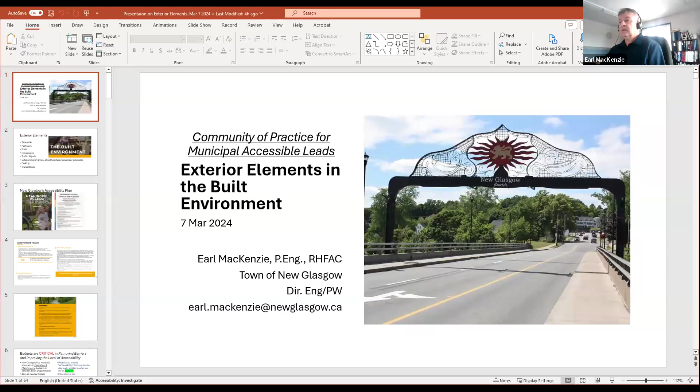So I'll get going, I'll share my slides here. I'm just making sure... Okay, can everybody see the main slide, not the one with the side notes? Is it just one slide that you're seeing? Yes. Okay, so let's get going.

I'm going to try to make this just like a conversation. A lot of things we've learned over the years, a lot of things we're still learning. I was selected or asked by Julie to do this, but that doesn't mean New Glasgow is that much more ahead of anybody else. We're still learning, all of us as staff members. I'll have some slides here of mistakes that we make, but it's meant to see if we can learn.

Before joining New Glasgow, I was in the town of Trenton, so I'm pleased to see Mary Lou on today.

So I'm going to talk about exterior elements. This isn't meant to be like a table of contents, just some basic ideas of things we can talk about today. We might even do them in a different order, but I want to talk about sidewalks and pathways, trails, a lot about crosswalks, some about traffic signals - and I realize every municipality here probably doesn't have traffic signals, but they're so important - exterior ramps, street furniture, temporary sidewalks, either ones constructed to support an outdoor cafe or during construction.

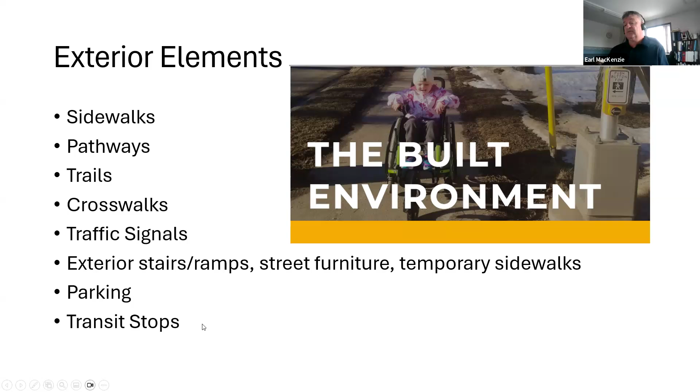Parking is so important, and New Glasgow is just getting into the transit world. We have lots of improvements to do there, so you'll see some slides that aren't very flattering.

So we have our accessibility plan that we're working towards. I find that we're slow, but probably no different than a lot of municipalities. As the accessibility lead, it's not a dedicated position - I kind of mention this at different times when I speak that I'm the Director of Engineering and Public Works, so this is still kind of on the side of my desk.

New Glasgow is big enough that I'd like to see us work towards having a dedicated coordinator to really help push us ahead. But we've been doing some good work, and some of that will come up in the slides.

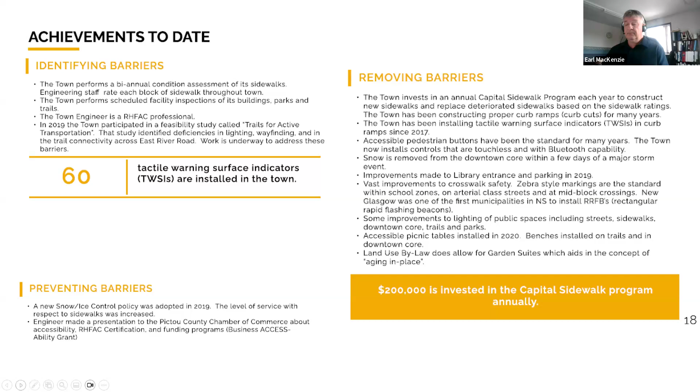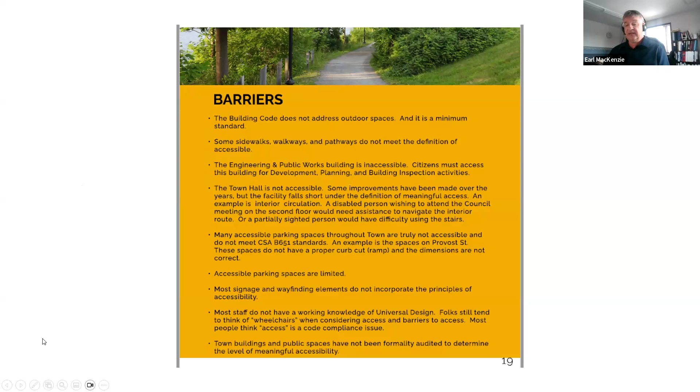So we have to have a program to replace these. All of this stuff has to be picked up by audits - an audit is where we actually identify the barriers and determine a plan and a way to fund that plan.

So I want to start really with budgets, from my perspective. Budgets are critical in removing and improving the level of accessibility. Similar to everybody else, we have two main streams: our operation and maintenance budgets, and our annual capital budgets.

Within our operation and maintenance budget, there are many line items that actually go towards improving accessibility and removing barriers. We need a common sense approach to asset management, and that includes accessibility. We do have an asset management plan, but I'll admit that's not something I pick up on a daily basis to do my job.

It's kind of, we get the check mark by having an asset management plan, but it's more the practices and the staff on how we do our business. So we need to embed accessibility into our day-to-day work. We do that for safety - like every job our crew does, safety is paramount.

We're not always thinking of accessibility, and accessibility crosses over so many different departments, whether it's recreation or public works. But we have to be looking at it. First of all, we have to be educated. Education is key. We have to understand what meaningful accessibility is. I know there's still folks out there that think accessibility just has to do with a wheelchair user, but it's much more than that. Accessibility has to involve everything we do.

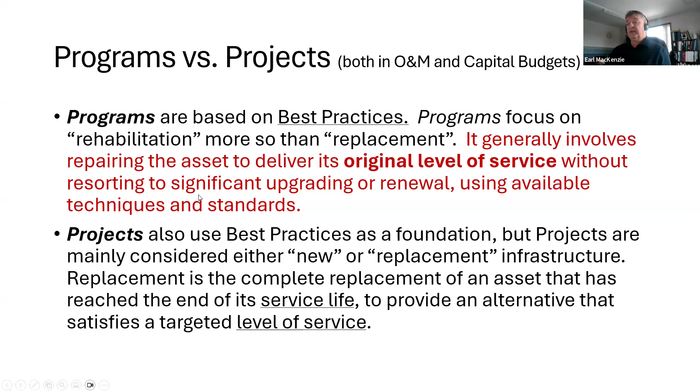In our budget submissions, we have two kind of streams. We think of things that are programs, based on best practices and items required annually every year - a good example is a sidewalk renewal program. Then we can look at budget or projects, where we do a replacement or a new item - maybe the construction of a playground is a project. But both are directly linked to the budgets and directly linked to accessibility.

I wanted to talk about sidewalk construction - that is so important. Public Works in the town of New Glasgow constructs our sidewalks. We're very lucky to have a dedicated and very good crew that construct our own sidewalks. We rarely contract out sidewalk work. If it's part of a larger project like a water main renewal and sidewalk work is included, then that will be done by a contractor. But in general, the town of New Glasgow installs their own sidewalks.

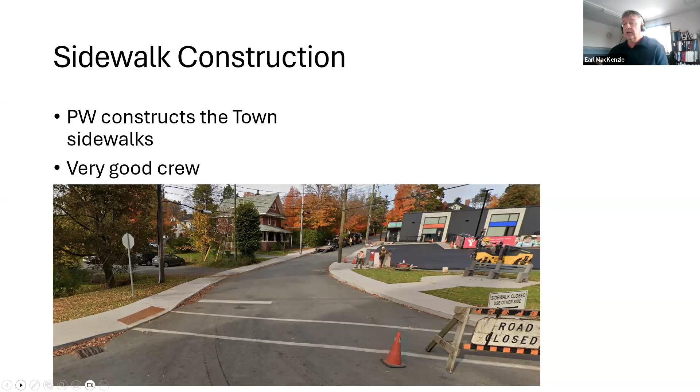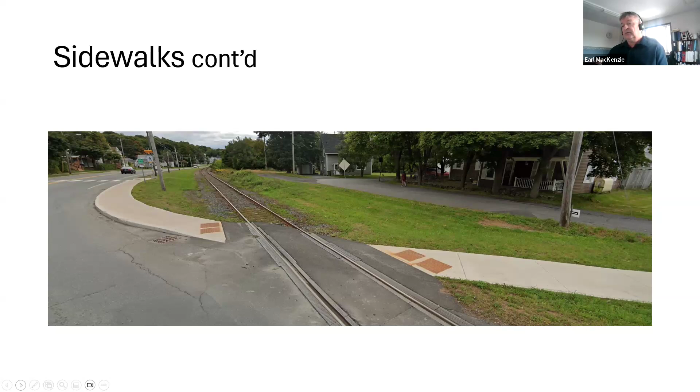Now you'll see the tactile plates in this picture. I don't like when they install the tactile plates with a space between them - that's an example of where we continue to learn, and as staff get more and more used to installing the tactile plates, hopefully we'll do a better job. I'll show some examples later that they're not as easy to install as they show on a diagram - you'll see, in B651, they're a little bit challenging sometimes to get them in.

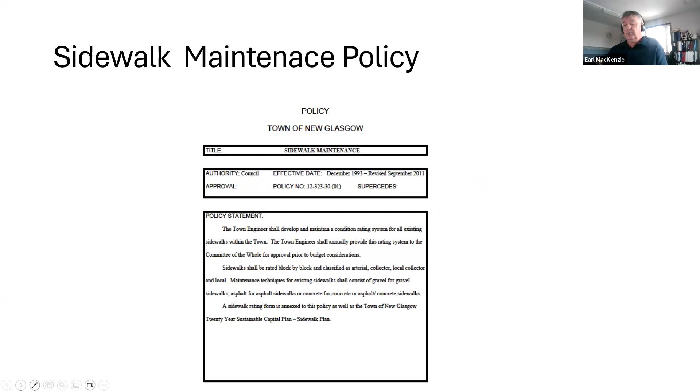So we start with the sidewalk maintenance policy. Here's a policy, I believe, from 2011, and what that policy states is the engineer will develop an annual rating system for our sidewalks. So we do have a rating system for our sidewalks, but actually we do it every 2 years, so it's not quite as the policy says.

Every year or every 2 years, we have an engineering student walk every inch of sidewalks in town - again, that's only the sidewalks that exist, we also have to put sidewalks in where they don't exist. The student looks at things like cracking, raveling, dips, trip hazards, drainage, other. What I want to add to this list is curb cuts - one might have a sidewalk that's in relatively good condition and doesn't warrant replacement, but if you come to the intersecting street and there's no ramp, well, that needs to be corrected.

So we consistently were doing that. I will say last year this line item didn't get funded, so we only did the work in the O&M and weren't lucky enough to be supported by council. So that's a challenge. Again, back to my statement on budgets - if we don't have the money as a department, it's pretty hard to make the improvements.

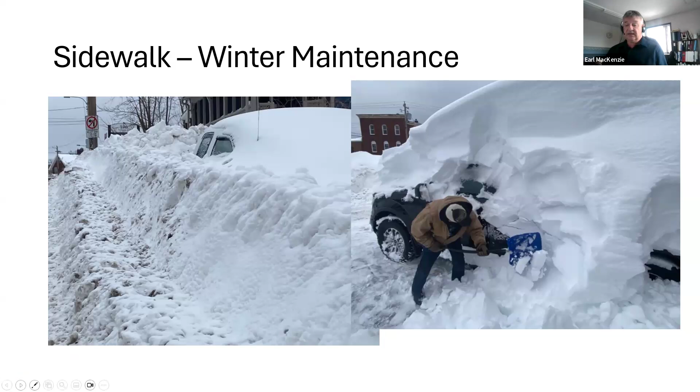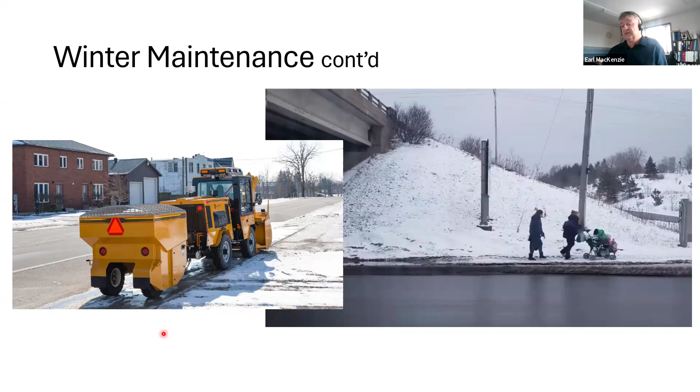So when we talk about winter maintenance, the town of New Glasgow has a relatively new, because it's 2019, snow and ice management policy. So what we did in 2019, we looked at our old policies and developed a new comprehensive policy, mainly to do with clearing of streets.

Now that is a very subjective statement. What does that mean? Does it mean that something should be cleared within several hours of a storm? It depends on the size of the storm. So there's a lot to go. A policy by itself is not the answer solely.

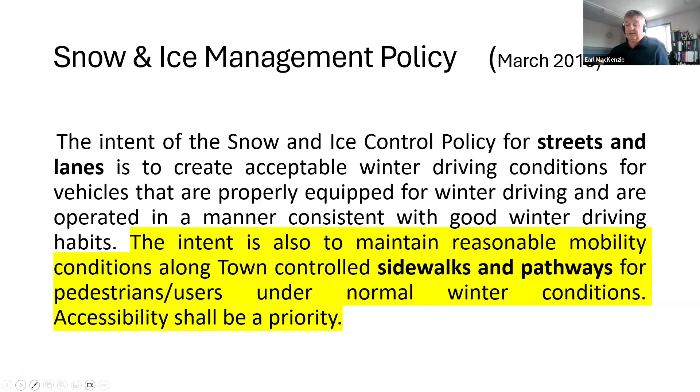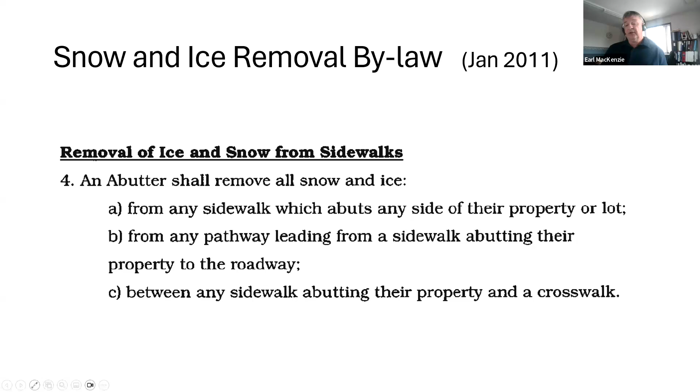Now, the town of New Glasgow does still clear those sidewalks with the machines that I showed before, but it really is the abutter or the property owner responsible for maintaining that sidewalk. But again, 9 times out of 10, our machines are through before anybody is even clearing it. That's the only area in the town of New Glasgow where the property owner is fully responsible for the sidewalk.

We have about 7 kilometers of urban trails. The Samson Trail is probably in a little bit better condition, mainly because the other trails don't have lighting, whereas the Samson Trail on the west side is a very highly used trail. Folks come from out of town to park and walk the trails.

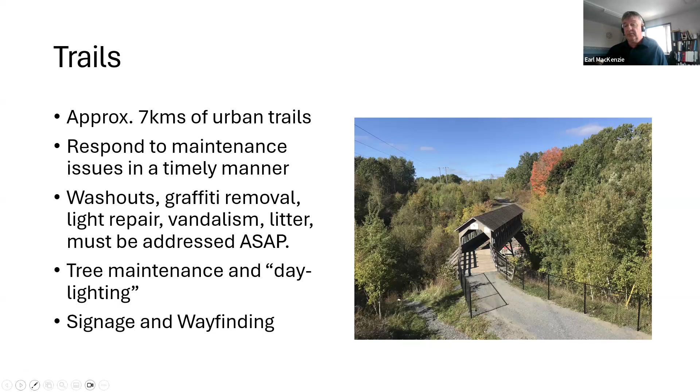So there's a couple of pictures of our Samson Trail. It is an urban trail. It isn't paved, this is mainly crusher dust. So it does answer the need for a firm level surface, not as good as asphalt paving.

The picture over here on the right is a bridge that we did a couple of years ago, I'm going to guess a replacement of a bridge. But now, as I'm looking at this picture, should there be a proper handrail along there? Probably. But at the time, that's something that nobody would have even thought about. They would have constructed what we refer to as a guard, more for protection, but not a handrail. Now it's a wide bridge, so I'm not sure, but I think a handrail would be warranted there.

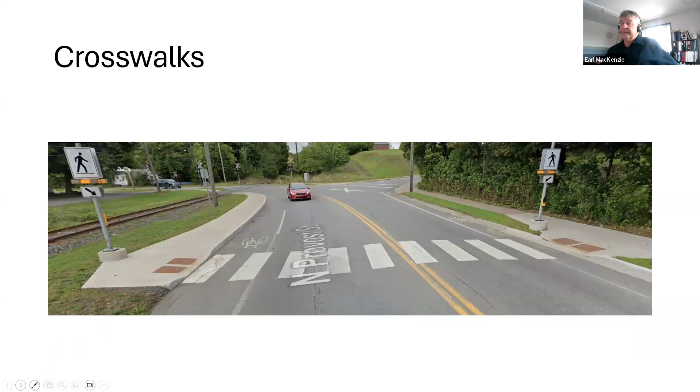Okay, let's talk about crosswalks, because they're so important. Just a photo — this is actually at that same site where I showed before, but here's a crosswalk. And I'm going to talk here in a minute about different types of crosswalks and how you go about determining how to properly construct a crosswalk.

So that's one thing you have to understand. It's dangerous to go outside the guideline if there was ever litigation or an accident or something, because everybody's litigious now — what would be the reason that you felt it was okay to go outside the manual?

So you'll hear a lot of engineers and public works departments refer to the TAC manual, and we can't change crosswalk design or crosswalk requirements. It certainly comes up every time there's a discussion about a rainbow crosswalk. You might hear that you're not allowed to do that because that's not in the TAC manual. So we have to be careful.

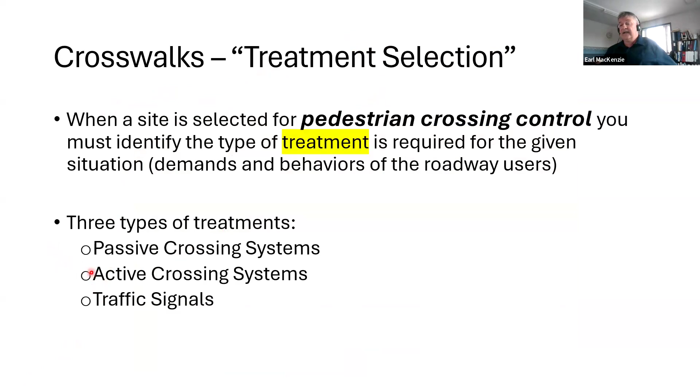So a passive, that's the most basic, and really what a passive crosswalk is, it is pavement markings, mainly just two white parallel lines, and the side signs. That's what they call a ground-mounted basic crosswalk. So that's passive.

There's under passive, there's still enhanced crosswalks. So that's ground-mounted signs, but they're a little better. One example is the Seabrook crosswalk that you see here, or they may hang a sign above, but it's still passive — there's no interaction by the user, except for crossing. This is called a mid-block crosswalk, and mid-block refers to there being no vehicle controls here. The pedestrian's crossing in the middle of a street.

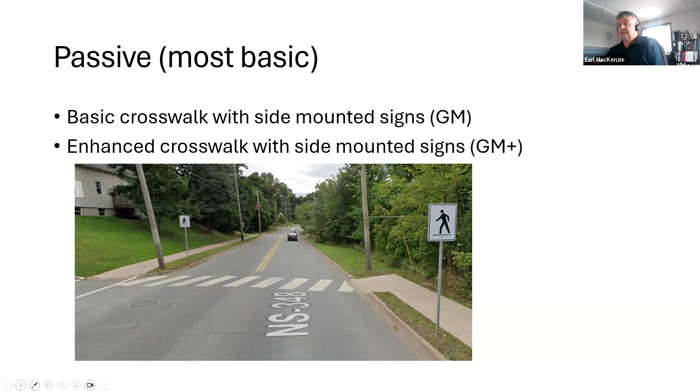Those are the ones that give designers the most stress because there's limited controls. So if we move from passive, there's two more types under active.

Everybody now is starting to see these RRFBs, rectangular rapid flashing beacons. New Glasgow likes to be ahead of the curve. We were probably the first municipality in the province, and that even includes HRM, to install these. I saw these at a TAC conference, and there was a study done in Alberta, so we started looking at them. This installation wasn't the first one, but we were proud to be one of the first in the province. I don't know, maybe HRM had one that I didn't know about.

These are rapid flashing beacons. They're considered active treatments and offer a higher level of protection. What it involves is pressing the pedestrian button, the lights come on and flash quickly, but it's still only a warning light. Vehicles can still go through the crosswalk. They'd be against the Motor Vehicle Act if there's a person in the crosswalk, but it's a better level than the passive control, though not the highest level.

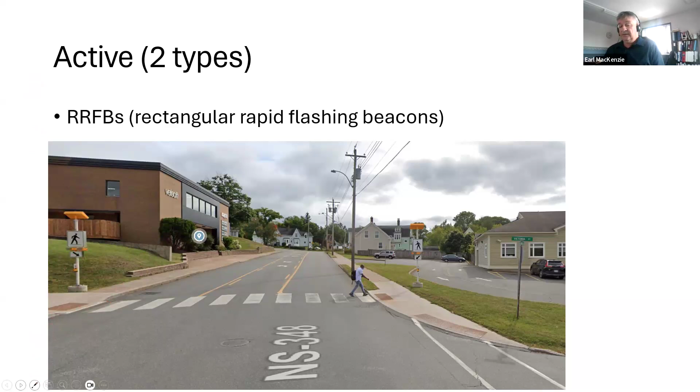So here's some pictures of RRFBs. They are controlled by pedestrian signals or pedestrian buttons. I will want to talk about these. We've gone to this version.

So they're actually, you don't have to press the button, you can just wave in front of it. This is kind of the next generation. And I have a slide here where these can actually be controlled by your phone.

When I was down taking pictures this week, I went to the other side, and you'll notice there's something missing. Somebody actually stole the pedestrian button right off the pole. I wondered if it was hit by a sidewalk machine, but there's a harness that connects this device to the wiring, and you can see where it was unclipped. Believe it or not, somebody actually stole this for whatever reason.

So we're always dealing with vandalism. This crossing right now is basically out of service until we can get a pedestrian button put back on. They tell me that this assembly is worth about $1,000, so for just foolish vandalism, it's crazy. This is the other side, just a picture of RRFBs. I know that most folks on here would know what they are.

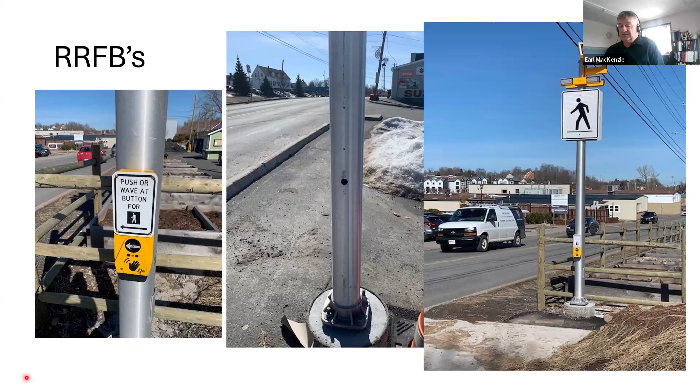I think you're seeing them a lot more in municipalities now. Again, this is a screenshot off my phone. I will say that something's not working right, so we're going to work hard to get these going. These should be able to work so that just as you roll up, say you're a chair user, as you roll up towards the buttons, you could press the button on your phone.

So when you look at this installation, does this larger sonotube concrete base present a barrier itself? Should it be lower so that the wheelchair user, or anyone, doesn't have to be a wheelchair, can get closer to the buttons?

Back to winter maintenance, nowadays everybody's in a machine doing the work. Our sidewalk machine will come along on their route and continue going. Nobody's getting out with a shovel to clear around and get closer to the button. So we still see problems where, yes, the sidewalk is clear of snow, but now there's a big ridge and you've got to climb over that to get to the button.

So that's it, back to education. Our crew have to do better, have to understand that we need to clear that snow. It's not acceptable anymore to not have access to the buttons. But again, with this app, or the fact you can wave, that does add a little bit of improvement, because maybe you can just get closer to it without actually having to press the button.

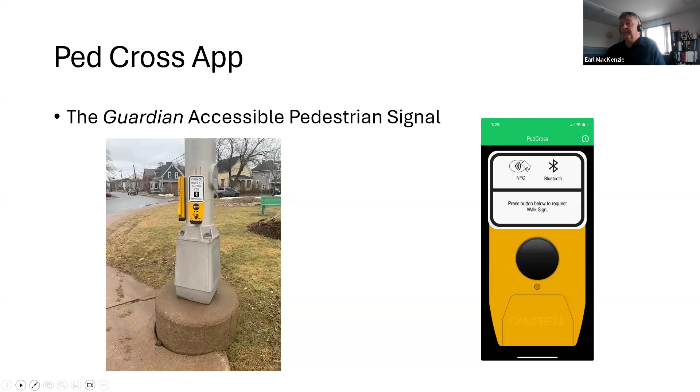This is the second type of crossing, the overhead flashing beacons. They're what they refer to as RA5s. RA5 is actually the sign, the black and white sign, but most people refer to the overhead as RA5s. In this particular instance, this was the second installation of RRFBs. We actually installed it at a location that already had the RA5.

So in one way it was a waste, but a new apartment building was built right here and the sight distance was bad. So we installed the RRFBs even though one already existed.

As Nova Scotia Power came and the crews came to replace utility poles, nobody was touching these, so this street was blocked for many days. That's a whole different story. But we never replaced the overhead RA5s, and I've had questions from folks in this apartment building saying we lowered the level of safety here, but in reality, you only need one of them.

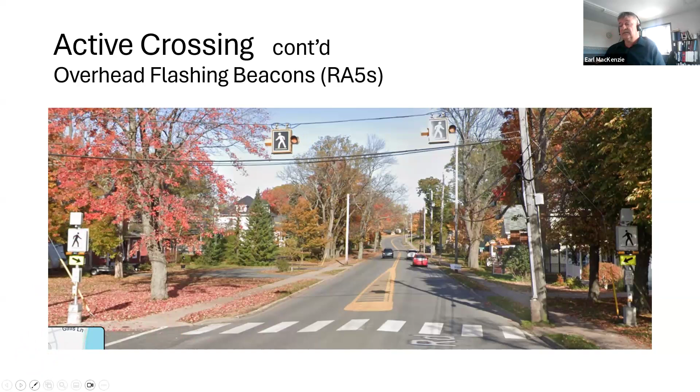So we're not replacing them. They offer both the same level of protection under the active crossing. We're not installing the overheads because that's not what we've been putting up. We've been going with the RRFBs.

This is another overhead, a picture of HRM. I'm not quite sure where this is, but it kind of represents the overhead. So there's pedestrian buttons that you would press.

I think the next slide we're going to talk about signage. So if you look at this crossing, this has to be in a school zone. I could continually see wrong signage.

For crosswalks, there's really four here, but I'm going to go back one. There's this one up above, which we say is a walking person - it's black with a white person, whereas the sign for a crosswalk is a black person on a white background. So here's the regular crosswalk - that's the only sign in the TAC manual.

Here's the one for the school zone - it's two people, I guess representing children. Or there's an advance warning sign, if that's in advance of a crosswalk, if it's needed, say sight distances aren't good. And then here's your school zone sign that's posted to indicate or delineate a school zone.

So we continually see wrong signs. You'll see this sign with the two children just used anywhere - that's all the staff had so they put it up, but it's wrong. It's meant for a school zone. And if you see these greenish signs on the rectangular sign, yes, it might look better or brighter, but it's wrong. So you see a little bit of everything in different municipalities.

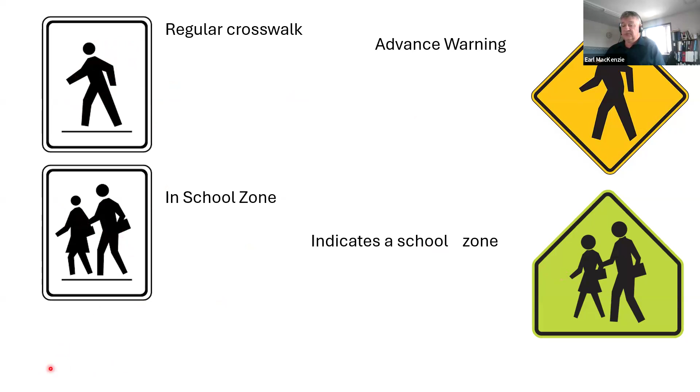So there's really only two crosswalk signs - one both rectangular, one is this top one, and one is for the school zone. So consistency is important because we should all be doing the same thing across Canada.

I'm going to talk a tiny bit about traffic signals, and there's two types. I know maybe most folks on the call today don't have traffic signals, so I won't spend a whole lot of time - just a quick shot from the TAC manual that there's all kinds of information in it about traffic signals. So we have pedestrian signals and then full signals.

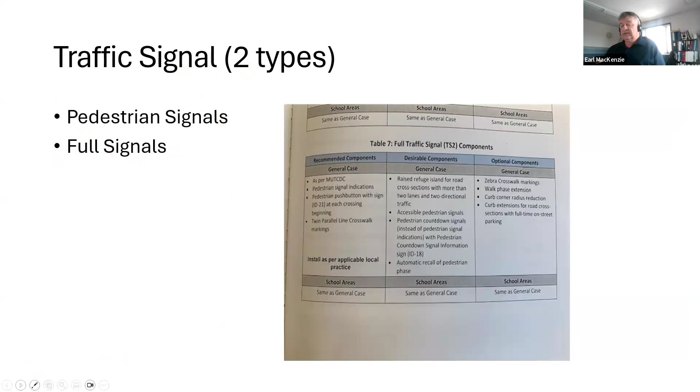The pedestrian signal, I'll show it on the next page - we install one of these. I'm only aware of two in the province. So when you're coming over the McDonald Bridge and you're heading to Dartmouth and the Sportsplex is on the right, you'll see the same kind of signal. It's a set of signals, activated by the pedestrian.

If there were no pedestrians there, that will stay green forever. So this is the highest level of treatment - it's fully controlled. So if a pedestrian touches or presses the button, the vehicle movements are controlled. The cars or vehicles will come to a complete stop like any other full intersection, as opposed to the RRFBs, which is just a warning light.

I'm not aware of another - or maybe HRM has two - I don't know if there's any other of these installations in Nova Scotia. Why we installed it: it's East River Road, which is a 4-lane, actually a 5-lane street. And on this side is a trail, and it connects to a trail on the other side.

There was no possible way for pedestrians to safely cross at that point. We expected them, if you're a trail user and you're coming along, to go down the road to a controlled intersection, cross, and then come back. That wasn't happening - people were taking chances running across. The other thing, because of the 5 lanes, there's an area of refuge here.

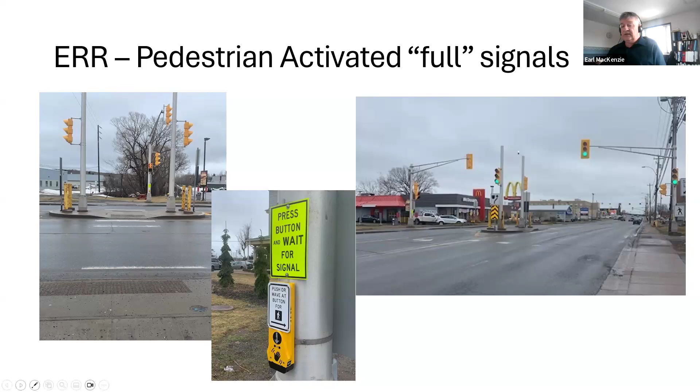And a lot of misinformation. But this provides a very safe crossing for all users - all of these crossings aren't just related to disabled persons. You'll notice the tactile plates, the buttons that you can wave. So we're trying to make sure every new install is done to the best technology.

Speaking of old technology, just quickly on traffic signals - the first versions were on timers. So it could be 2 a.m. and you're coming along and you'd still have to wait for the intersection to go through its time cycle. A lot of those don't have PED buttons. All you did as a pedestrian was wait for the other street to get the go, and then you walked. You may or may not have pedestrian signals. Nobody is installing those anymore.

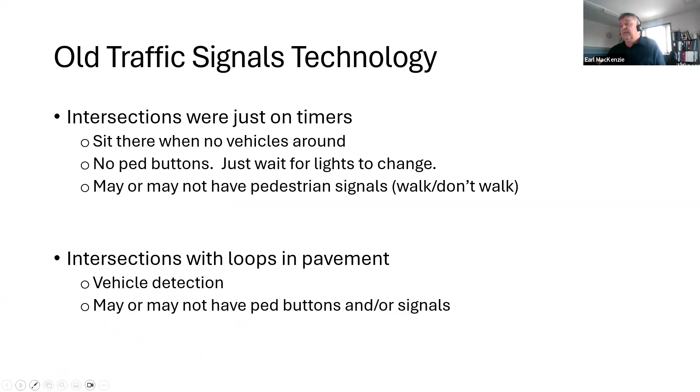The second kind of iteration of those were pavement detection, vehicle detection loops in the pavement, and they may or may not have pedestrian buttons. But I'll still hear nowadays from folks, could we adjust the timing on something? We don't even have that anymore. What we do have is Wavetronix SmartSensors.

So the purpose of those is to pick up movements of the vehicle. When a vehicle comes, this instrument knows there's a vehicle, and that's how the signals work. But what it doesn't do - and one of the reasons is we want vehicles to be moving quickly - everything from anti-idling. There's no point of a vehicle sitting at an intersection with nobody else around, waiting a minute to go.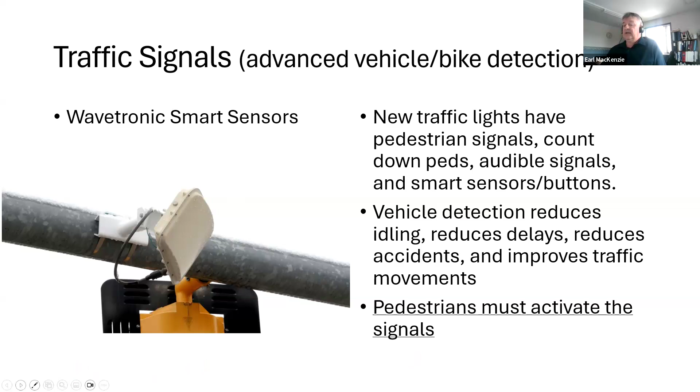So what it's led to, and this is why education is important, is pedestrians must activate the signals, because you could stand at one of these intersections as a pedestrian, the light changes, but the PEDs and the countdown PEDs aren't activated because nobody pressed the button. As users get more familiar with these, they'll get to know that. But initially we had some of these installs and people thought the pedestrian signals weren't working properly because the walking person symbol never came up. You have to press the button.

I wonder how my time is. Okay, Julie? Okay, I'll keep going. Yeah, you're good.

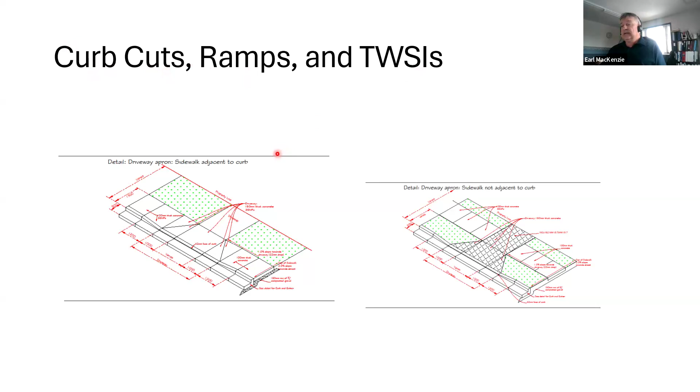Okay, curb ramps. A little bit of discussion on curb ramps, curb cuts, ramps and TWSIs. Go to the next one. We're not going to try to dissect this, but this is one of our standard drawings, and it's really about driveways. But a driveway is very similar to a curb ramp. In this case, you'd have the tactile plates. What I want to highlight is this particular sidewalk is along the street, so the sidewalk abuts the curb, and then this could be an intersecting walkway or pathway.

What we have to do is install these correctly, and I'm still seeing them not done. As you come along here, I'm hoping people can see my little red beacon - this has to drop down. I still see a lot of places where either this goes through at the same elevation, and then they try to just ramp a little bit of this concrete down. There is a proper way to do this, and it's shown in B651. But construction at the time is so important to do it right.

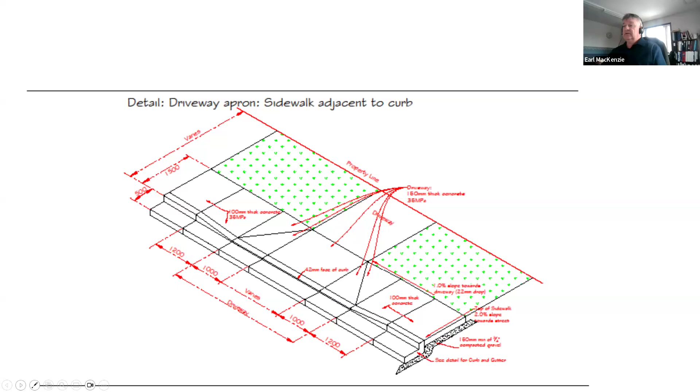This is even a better example, where they show a median. I see a lot of municipalities run the sidewalk straight through, and if this sidewalk is, say, 6 inches higher than the road surface, then for this little ramp, all they do is place that later and make a steep ramp. So if it's a driveway, cars are bottoming out, or if it's pedestrians, it's too steep and it's not constructed properly.

As you're coming along here, you have to drop the sidewalk, and the front has to be dropped more than the back because you want the drainage coming out to the street. So important - you would think all contractors should know how to do that, or all staff should know how to do that, but they're not always done. And once the concrete's all placed, it is really hard to then say, oh, our own crew, we got to go back and remove that. That usually doesn't happen, and you're just left with something that you're disappointed in.

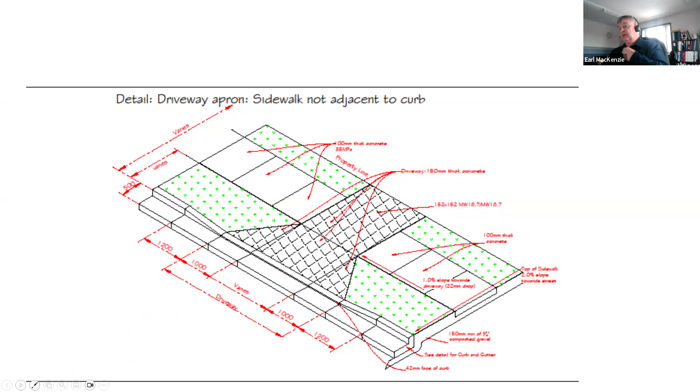A little bit on TWSIs. I hope all folks know what a tactile warning surface indicator is. Again, we were one of the first in the province.

At the same time, I happened to be in Bridgewater, and I saw Bridgewater had some red TWSIs in. We first installed the yellow plastic plates. I had a salesperson in here.

That was the first time even learning about these. I saw them in North Conway years ago, and at the end of a sidewalk, I actually thought they were probably to help stop you from slipping or something. I didn't even know what they were for. So after learning about it, we had a salesperson in.

Yellow is supposedly the last color you see if you were losing your vision. So we purchased them, plastic plates. You can also buy a glue down version.

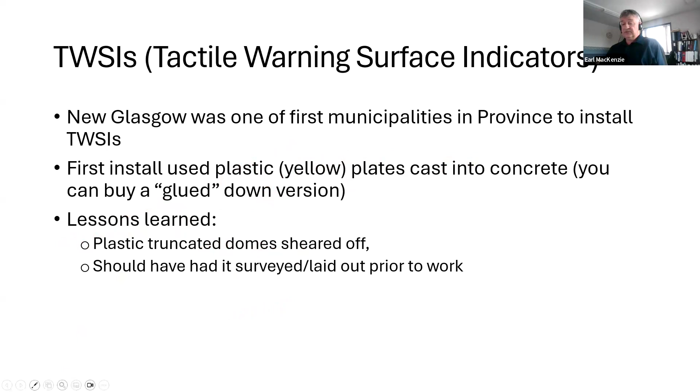But we learned a lot from that first install. The plastic truncated dome sheared off the first year by the sidewalk machines. And then I'll show you the installation here.

I do like the fact they're yellow, but we're going with the cast iron ones. Again, from a color contrast perspective, I was on the committee that helped develop the built environment.

We were very adamant about color contrast, but the TWSIs now, the cast iron, when they're put in new concrete, they do offer probably 70% color contrast, which is the patina, the rusted color of the TWSI, and the nice white concrete. As concrete ages, it gets darker, but there's no easy way.

You can't, first of all, even if you could put a coating on it, there's not enough staff to do that. That would really never happen. Then that would change. They could be slippery. So we may at some point not see the color contrast as these sidewalks age.

So this was our first install. What we did here, talking about learning lessons, we changed this whole intersection and made our curbs a bigger radius. And this was before considering pedestrian safety.

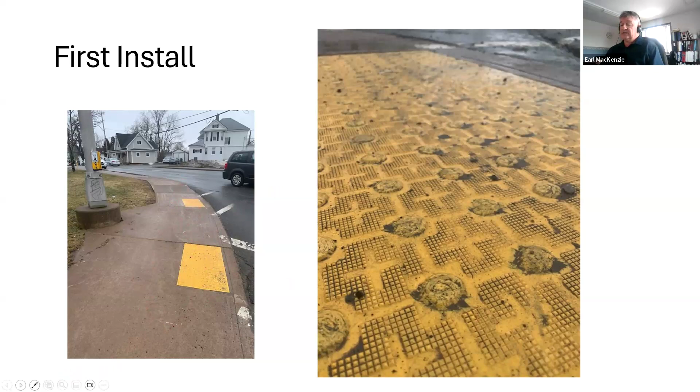Everybody has to paint every year. We do all our own painting, but it's a challenge. By the time winter comes, most of these pavement markings are off.

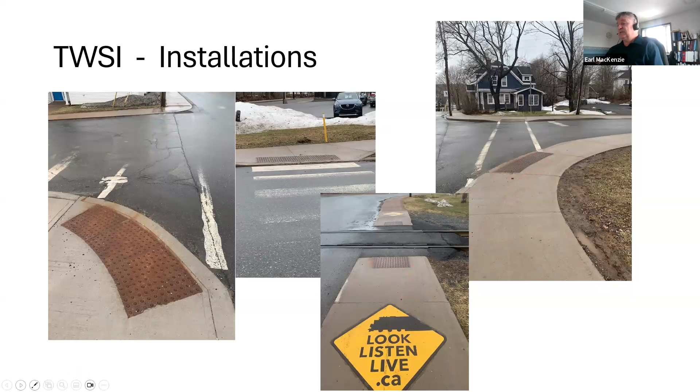They're certainly not as easy to install, and I don't mean they're not as easy to align as it does look on a piece of paper with it drawn. So here's some lessons learned.

We're certainly not perfect, we're learning. I'm not going to probably go back now and have all that jackhammered out. When we took the Rick Hansen course, we realized that you can't solve every problem, but even getting closer is better than nothing. I don't know in this particular instance if that's something we can say, okay, at least it's better than nothing, but they're not installed correctly.

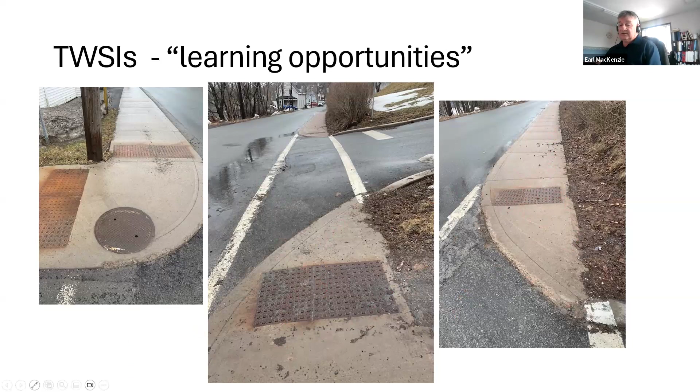So I'm going to be honest, I thought I had a picture during the storm, which I was away on vacation for. We had a complaint, and it went into the accessibility directorate. Snow was piled, and we had a massive amount of snow, and this is in front of our library and fire station on a very wide street. So this particular green space area, there was a big pile of snow piled on it.

This one was open, and we did receive a complaint about it. So I've responded back to the accessibility directorate, and we do have to do better. I'm not going to try to make excuses, but there was a tremendous amount of snow. I definitely understand the argument - if me as an able-bodied person, if there was a space that has snow in it, I have many more choices to find parking. We have very limited accessible parking spaces downtown, and we just have to do better. Back to the education, our staff have to know that you can't, you've got to keep these accessible spaces at a higher level of service than the other ones, because we just have to.

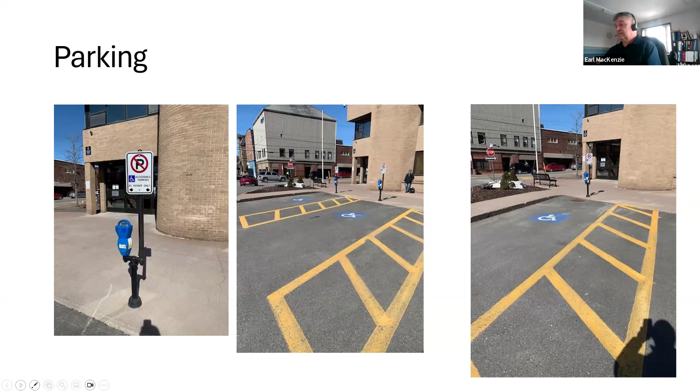Back to where we're not perfect. These are 2 spaces in our downtown. We redid our downtown sidewalks in 2010 - my predecessor, I had just joined New Glasgow. Big upgrade to downtown. Yes, we got a couple of spaces downtown, a nice torched-on symbol and a proper sign, but guess what, we don't have a curb ramp. So you're expected to get out in the travel lane and then roll down either to the intersection. We definitely have to repair or replace these.

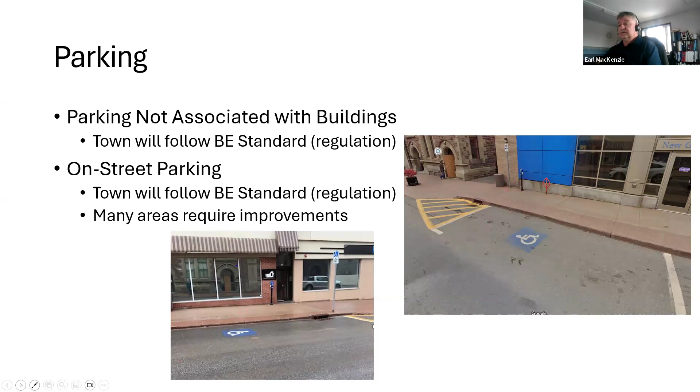A couple of good things - so it didn't go in yet, but the community development, that's our recreation folks.

Temporary sidewalks, so we have two kinds. We have the outdoor cafes. New Glasgow does have a bylaw, and we basically copied HRM, so it's almost identical, though I don't have the year on this. It was mainly just to allow the temporary sidewalk, safety, and car protection going around. There are some components for accessibility, ramps and that, but we really should be looking at all these bylaws again with an accessibility lens.

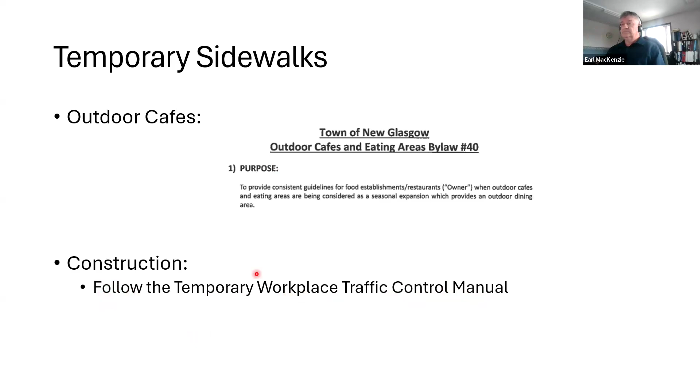Then we get into construction, and we follow the temporary workplace traffic control manual. I happen to sit on that committee that helps develop the manual.

This discussion was brought forward from HRM. In order to have safe pedestrian passage, there's two types of sidewalk signs. One says sidewalk closed ahead, usually placed at an intersection. The purpose is to give the user the ability to make the decision and cross, but allow businesses to stay open. We get all kinds of complaints if we close a sidewalk and the trench or whatever activity is 50 meters down — the businesses up close to the intersection say you're affecting my business.

So what the new manual says is you have a sidewalk closed ahead sign, and then at the trench or wherever the work is being done, you have the sidewalk closed sign. The problem is they're always on barricades, and a person with a visual impairment using a cane — it's not cane detectable, so the first thing you know they're falling over the barricade. So instead of coming up with a different type of barricade, the solution was to put cones. That's the new part — they were never there before, even though we used to put cones.

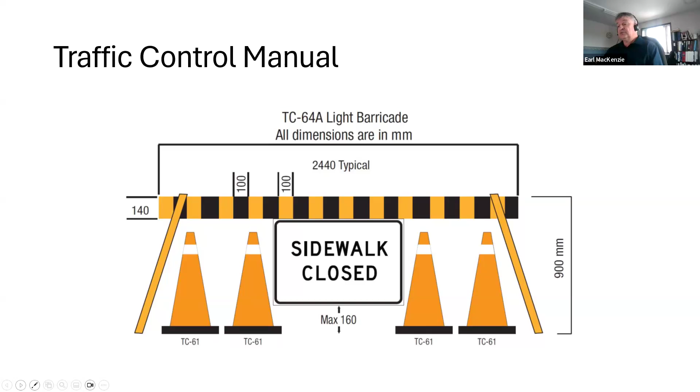A visually impaired person will know to go around the first sign, but when they get to the second one, we don't want them going around. So I think there have to be two different assemblies here — one for sidewalk closed, and one for sidewalk closed ahead. I was on vacation when this went through, so maybe I'm not understanding something from the discussion, but I'm showing this because they are working to try to improve accessibility, and this was the solution for cane detectability, just by adding cones.

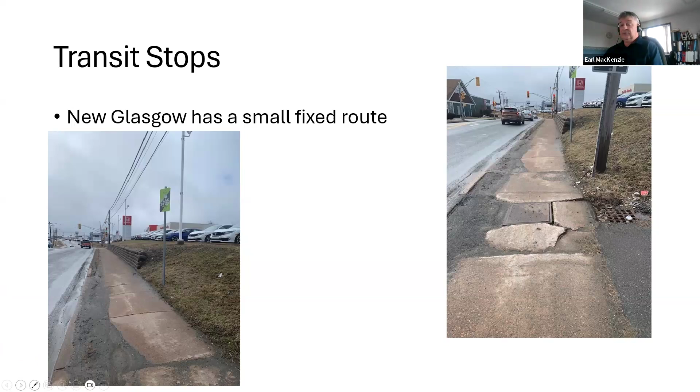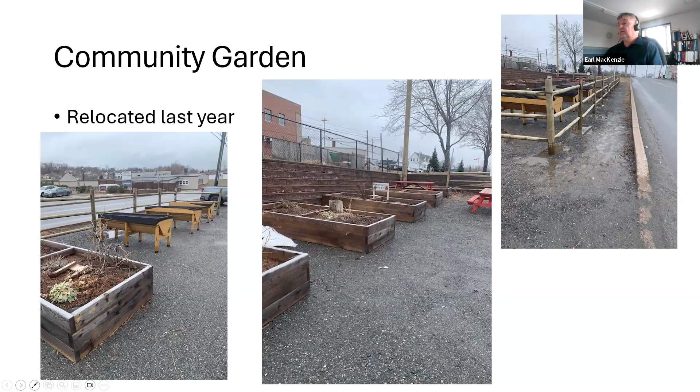Would you consider this accessible or not? I don't know. This picture here on the right, there needs to be a sidewalk come through there. I'm actually going to have them, believe it or not, remove these posts and push it in to get a better sidewalk there. So an attempt to make it accessible - they're not labeling it an accessible community garden, but we shouldn't have to label things. We shouldn't have to call washrooms accessible, we shouldn't have to say it's an accessible community garden. We just install one and make it accessible. We don't need to label everything accessible.

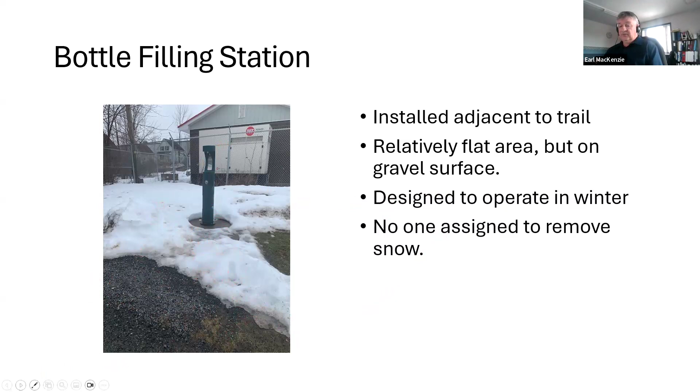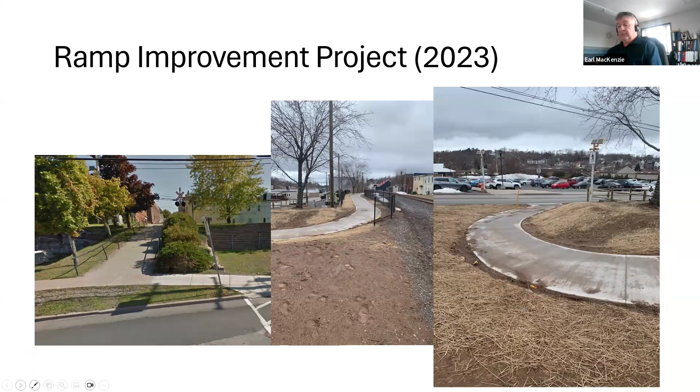Here's our farmers market, we have a proper crossing with RRFBs there. So this is a project we're proud of, to eliminate this barrier. Very expensive project because the railway is involved - we paid $2,000 a day whether the person was there for an hour or all day, just to sit in their own private vehicle and watch us work. So that added probably, plus some work they did, about $40,000 to that job.

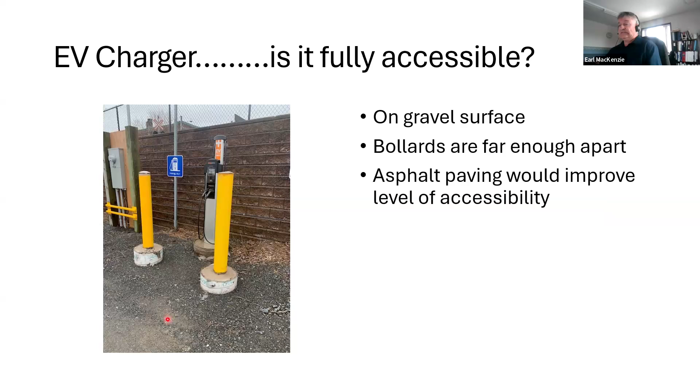We're doing better on benches. In the old days, we used to put a bench on a trail, make a little concrete pad, probably just the width of the bench, and you'd set it 6 feet off the trail. There'd be grass between the trail and the bench.

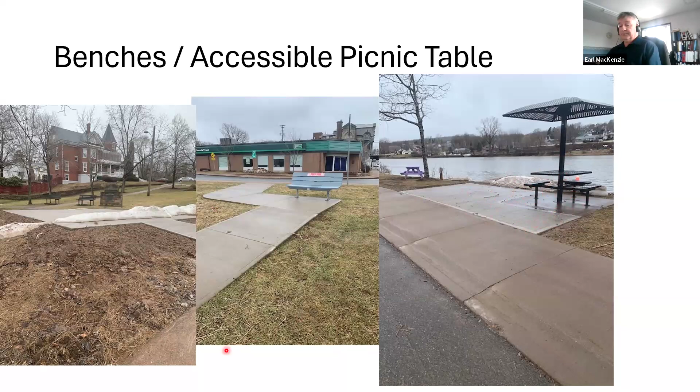They put it on an existing pad, but there was grass in front of it. So last year they made it more accessible. So again, we're trying to do things better.

I'll end with just some shots from Costa Rica if we got time. And they try, but we're so, oh God.

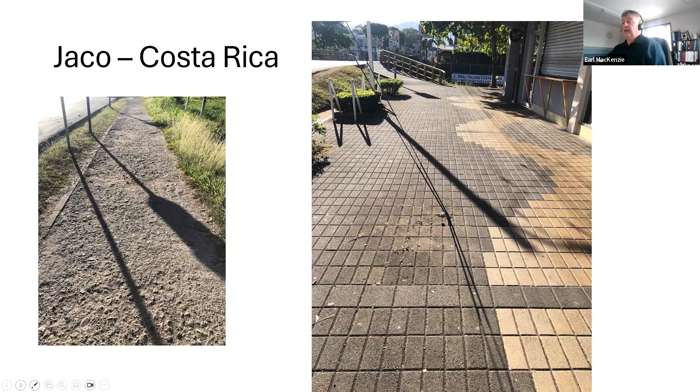So here's a typical sidewalk, this is in the town of Jaco. This isn't bad except for the guy wires that come down right in the middle of the sidewalk. So you're walking along and whack, you hit that. I have a funny story where I fell over something that I had seen on one way, and coming back, I just about killed myself.

Here's one of their ramps, painted yellow. But if you were walking along here and you weren't paying attention, you could kind of fall off, like the ramp didn't go the full width.

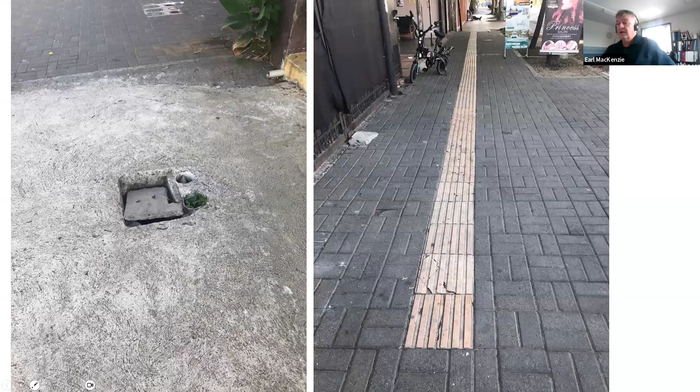All kinds of things just in the middle of the sidewalk. Here's an attempt at like a tactile surface. Why it's just on that section, I don't know.

Yeah, I kind of blew through that, but my point is you got to have a budget. You have to look after what you do have. Again, we build things and 5 or 6 years later things are falling apart, and you have to have a maintenance plan.

You need policies and you need bylaws to support it. But the biggest thing is education. Accessibility is not just a community development or a recreation thing, it's everybody's. And if we can embed that into all our decisions that we make every day, I use the comparison to safety, that it's just one of the conditions when we're thinking of something.